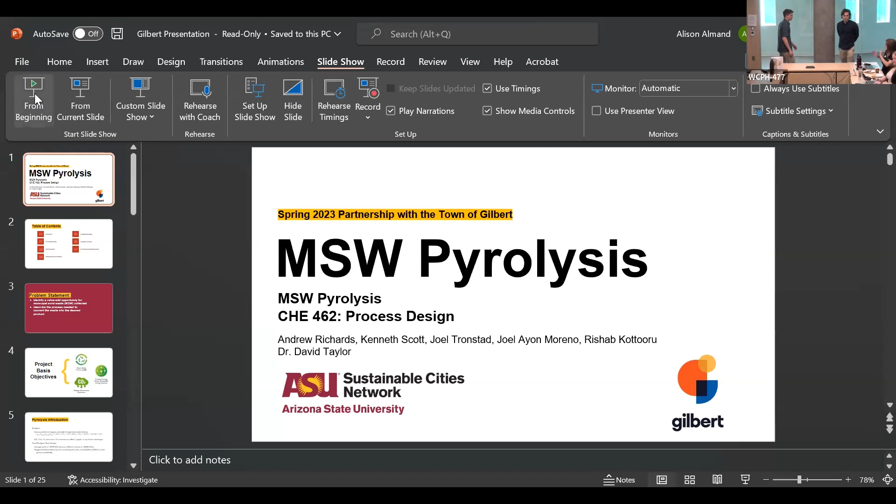So, as we mentioned earlier, the camera is set up over here, and I'll make sure you're good. Morning, Ann. Sorry, it doesn't show up much on the screen. I've got to stay focused here too with Teams running around. I'm gonna stand. This is exciting, I hope. Just grabbing some coffee. Alright, this is really cool.

Hello, we are team Sparky Solutions, and we decided to go with MSW pyrolysis, which we'll explain as we go. I'm Kenneth Scott. I'm Joel. I'm Rishab. And I'm Andrew.

We're going to walk you through an introduction on pyrolysis, our process flow diagram (PFD) along with a stream table for overall balances, a sectionalized review of our process covering 5 split divisions, and then our manufacturing cost summary, investment summary, equipment summary, as well as conclusions and recommendations.

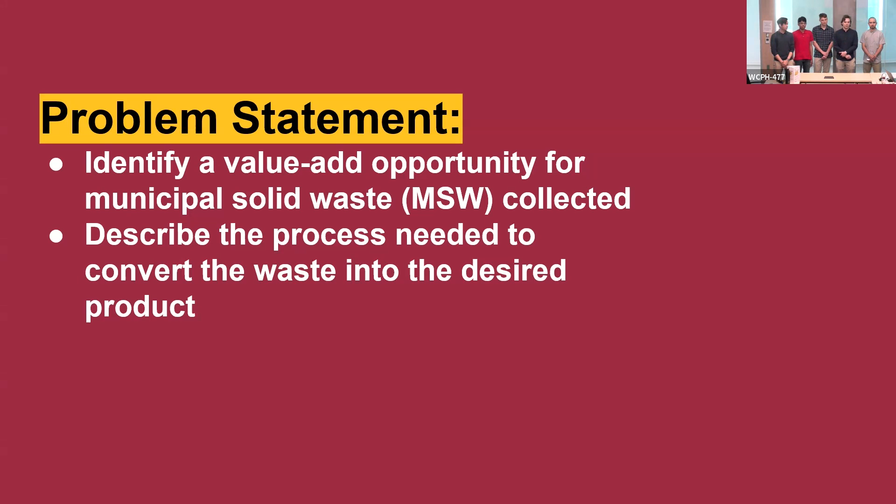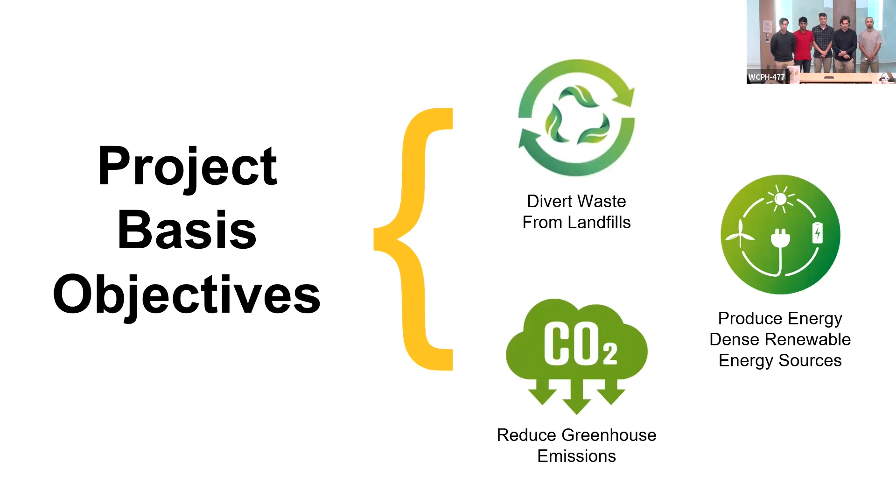To start, restating the problem statement: identify a value-add opportunity for the municipal solid waste that is already collected, and describe the process needed to convert the waste into a desired product that can be value add. Our project basis objectives were prioritizing diverting waste from landfills, producing energy dense renewable energy resources, and reducing greenhouse emissions.

So a little pyrolysis introduction. Pyrolysis is the decomposition of organic materials through anaerobic heating. That means you take things made of carbon compounds and get them very hot without oxygen present, which prevents normal combustion or fire from occurring. What that produces, as shown in the equation on the right, is bio-oil, biochar, ash, as well as carbon monoxide, carbon dioxide, hydrogen, and a little methane (CH4). Together those gases are called syngas, or synthetic natural gas.

In our final pyrolysis plant design, we ended up with an average profit of about $750,000, whereas Gilbert's current process, where they sell OCC and paper, is about $700,000 per year. Our suggested implementation would require first combining with other municipalities and their MSW to reach greater profitability.

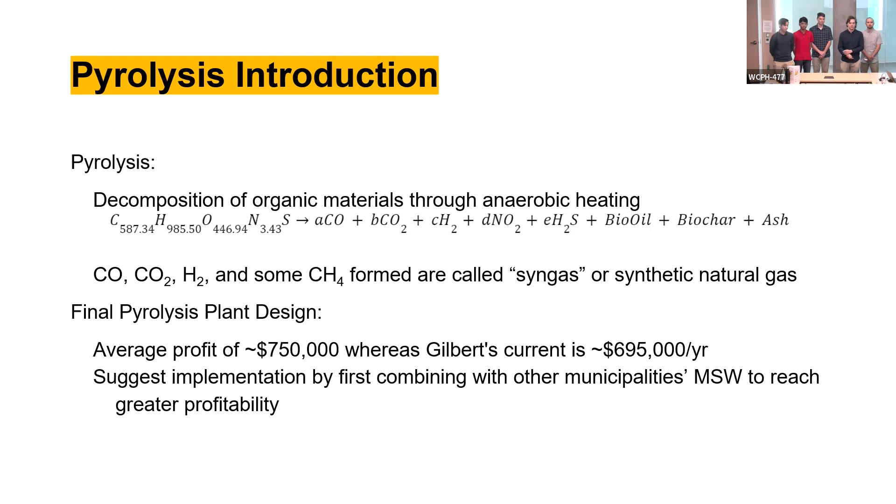So what does our overall process look like? From a high level, on the left in the green box, we take in the mixed municipal solid waste - all your glass, aluminum, plastics, cardboard, paper. On the far right, we make 2 useful products, shown in the blue boxes: syngas, the synthetic natural gas, and bio-oil, which is kind of like a natural gasoline substitute. Let's walk through the process to see how each step occurs.

First, we take in that mixed municipal solid waste and put it through a series of separators like eddy currents and knife crushers, and we remove everything besides the OCC - the old corrugated cardboard - and the paper. The rest of the municipal solid waste can be disposed of in the landfill or sold according to current methods. We then dry and crush the paper and cardboard to reduce the moisture content and particle size.

We take that mixture of dry cardboard and paper particles and put it into a pyrolysis reactor, heating it to use the high temperature to thermally decompose the organic components into useful products. From the bottom of that reactor, into the red box, we output solid biochar and ash, which we can't entirely use in our process as currently designed, so we'll probably send it to a landfill for now. Out the top of the reactor comes the syngas and vaporized bio-oil, both in a gaseous phase.

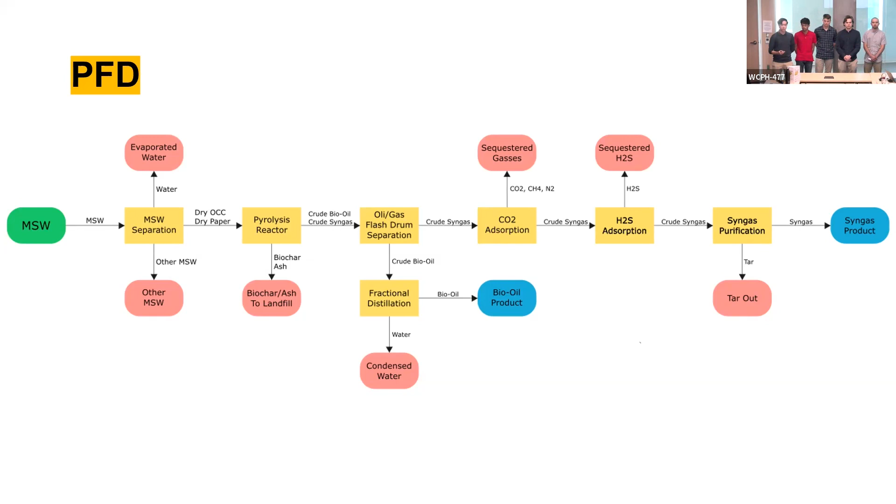At the top of the flash drum, we take the crude syngas and put it through a series of separations to purify and remove pollutants from the gas. First, there's a CO2 adsorption column where we use a physical zeolite, which captures carbon dioxide, a little methane, and nitrogen, removing them to prevent the release of greenhouse gases. After that, it goes through a dihydrogen sulfide column, which removes dihydrogen sulfide, a toxic pollutant that shouldn't be released into the atmosphere according to the EPA. Finally, it goes through one final syngas purification step where we remove some of the gaseous tar still remaining in the gas, improving the purity and heating value of our syngas product. That's the output of our final syngas.

So here you can look at our overall stream tables. This is the main inlet and the overall outlets of our process. On the left, we take in the MSW at roughly 19,000 tons per year, about 10,000 tons of which is OCC and paper, which is why we chose to simplify this process down to just those two. On our product outlet, the major products are syngas and bio-oil, and below in the waste outlet, we have biochar and water.

Water would be released as vapor through the drying processes. And the bio-oil, to give you an idea of the scale, that's about 21,000 barrels per year of oil. It sounds like a lot, but in reality, most very small scale petroleum facilities produce about 10,000 barrels of oil a day, so it's pretty small.

So it would be highly ideal to get more MSW inlet so this could be increased. Also, the bio-oil wouldn't just be one type of oil—it's not like it produces just gasoline. It produces a spectrum of oils of different densities, things like jet fuel, gasoline, kerosene, all of those. So not all of those would be used in tandem.

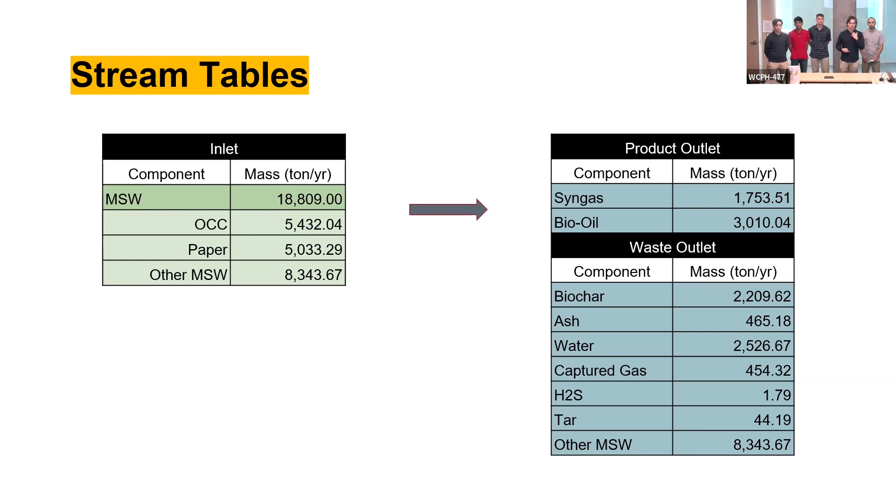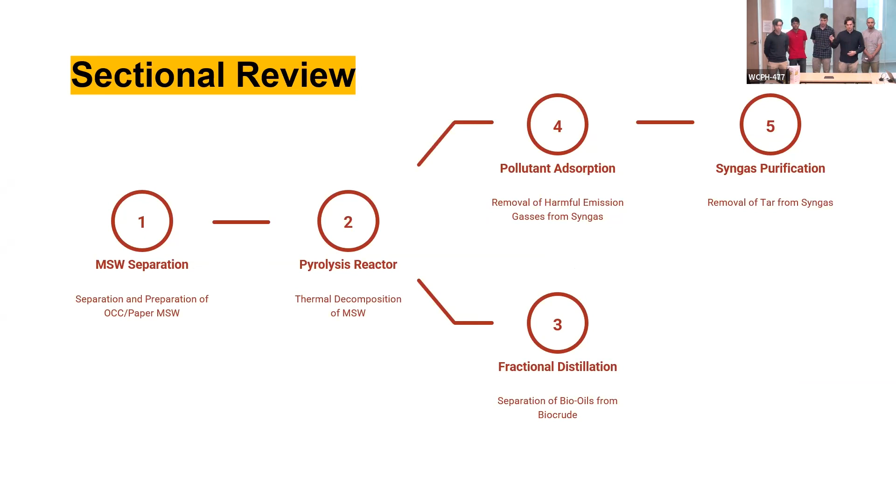So here's our section-wise review. We broke it down into 5 sections, one for each of us. We start with our MSW separation, then we have the pyrolysis reactor, then it splits off to the fractional distillation and the adsorption, and then the final syngas purification.

It was concluded that the addition of an optical separator was the best alternative, as it reduced the personnel operation cost significantly without raising the initial equipment cost or energy consumption too much.

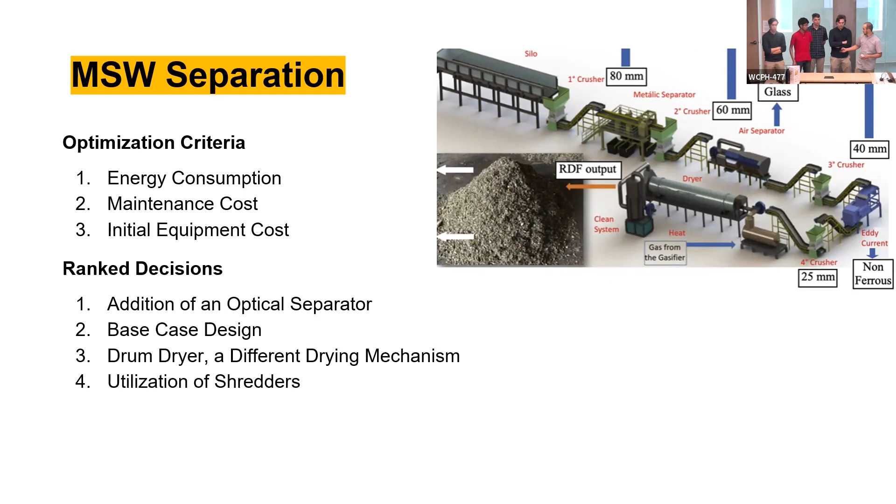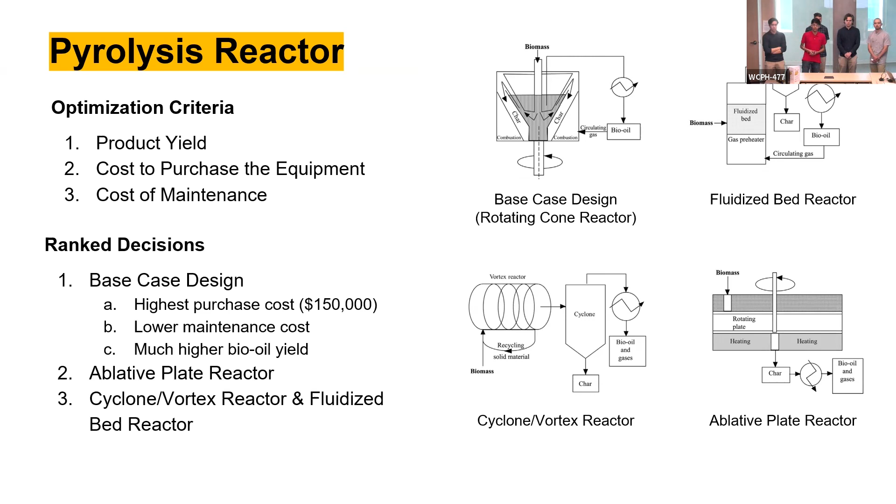Additionally, despite the higher purchasing cost of the rotating cone reactor, it has a lower maintenance cost—$70,000 to maintain, whereas the other reactors range anywhere from $72K to $85K. According to various literature studies, it has repeatedly been found that the rotating cone reactor can produce a higher yield of bio-oil compared to the other reactors.

Now, here are some applications of the rotating cone reactor. So this reactor is pretty new, but it's being used in other parts of the world. For example, currently a company in the Netherlands known as BTG-BTL is converting sustainable biomass into bio-oil using a rotating cone reactor. And many pyrolysis plants in Malaysia are also implementing this reactor. So they're taking fruit bunches from palm trees at a 50 ton per day capacity to produce this bio-oil.

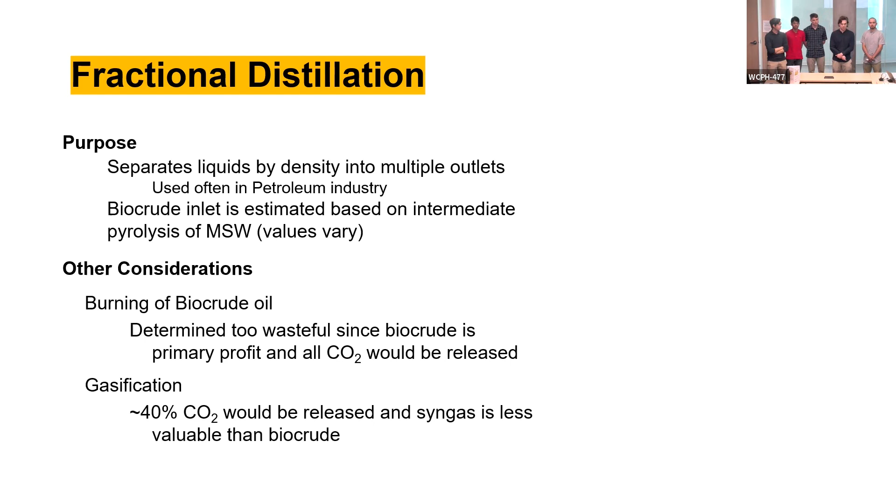And gasification would turn bio-oil into syngas. So we could have one pure outlet rather than two separate ones. However, with that one, once again about 40% of the carbon would be turned into carbon dioxide and would end up being released. And syngas is also less valuable than biocrude per kilogram. So we decided not to do that.

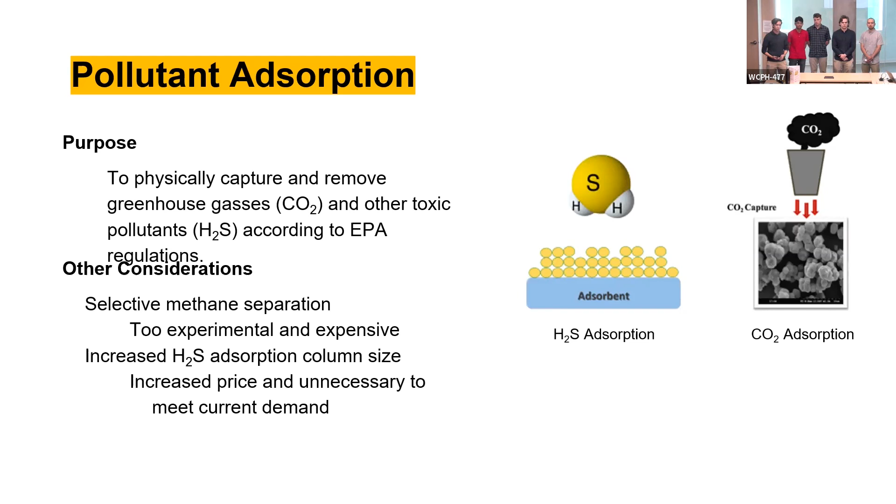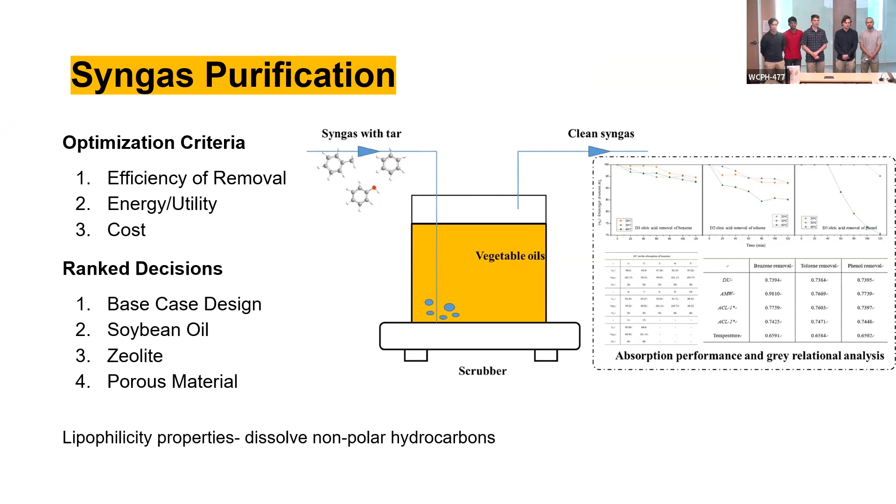The soybean oil operates very similarly to vegetable oil. However, it isn't quite as efficient. Our vegetable oil was able to achieve 95% efficiency, according to literature, whereas soybean oil was around 90% efficiency. Zeolite and porous material are other purification possibilities. However, those were also around 90% removal efficiency and were also more expensive.

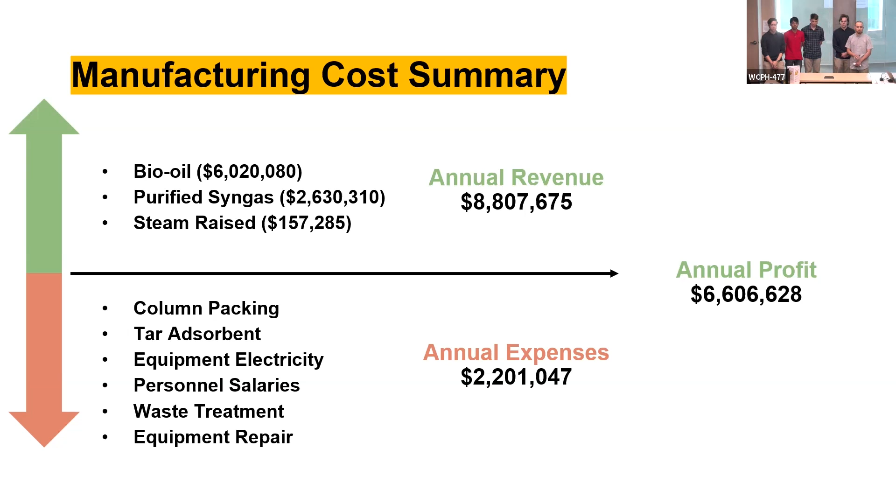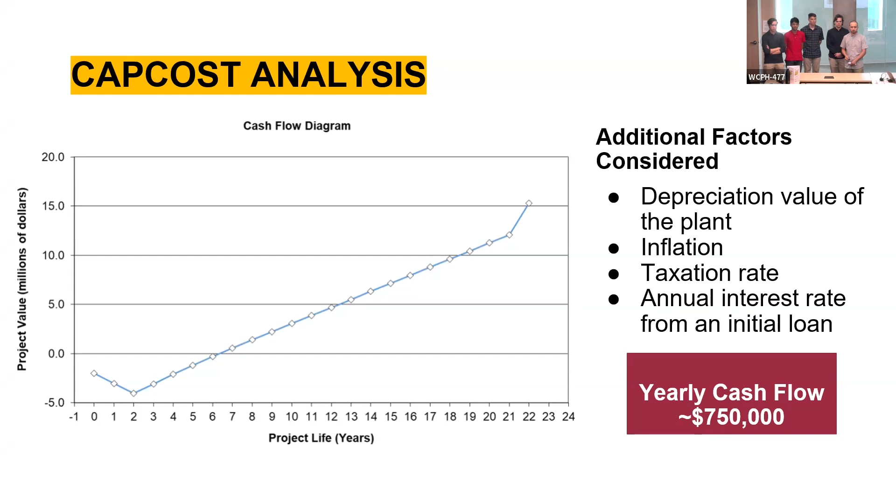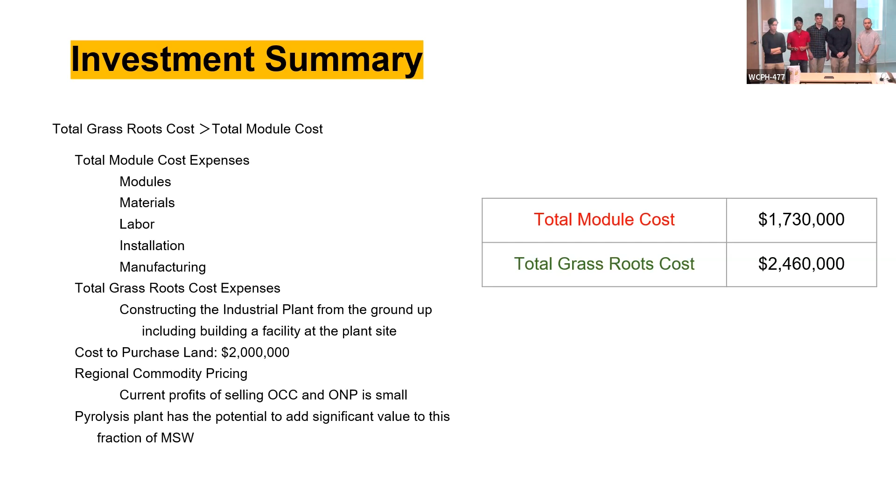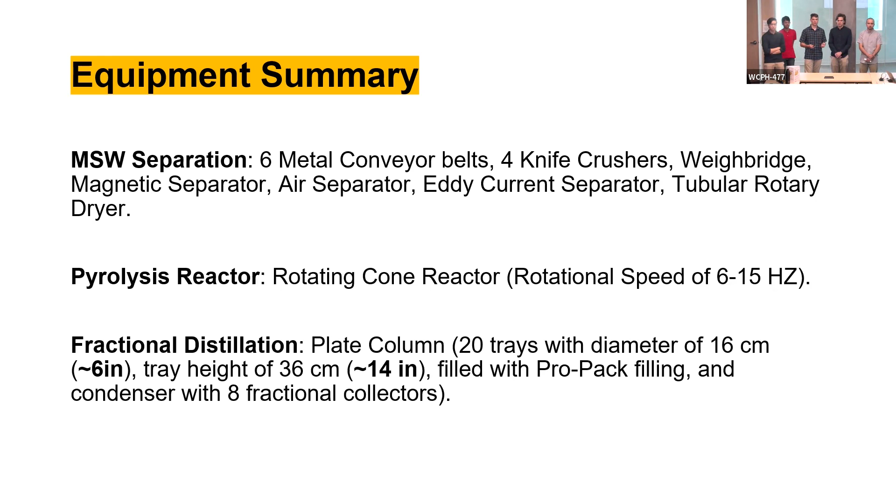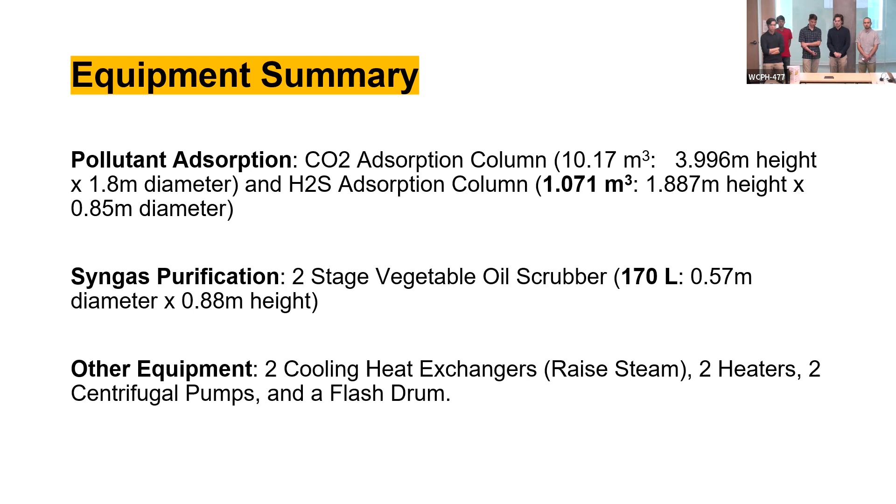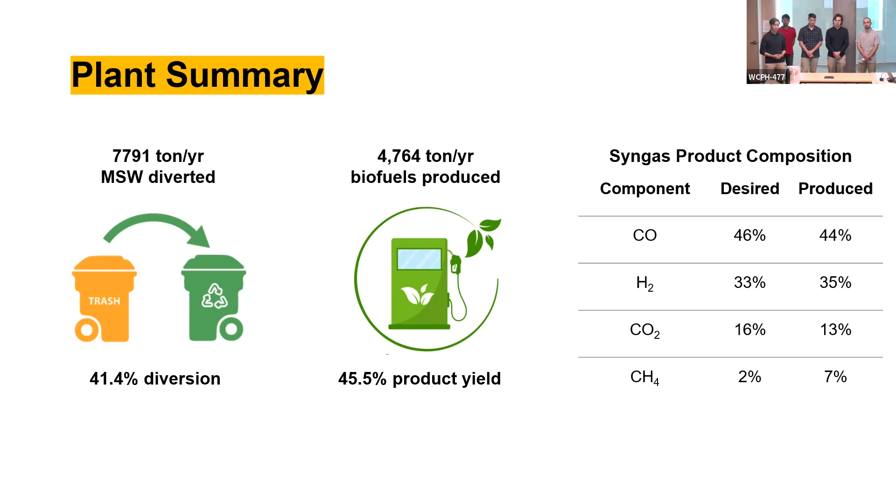In conclusion, we believe that an intermediate pyrolysis plant can be a viable option for the town of Gilbert, as it would reduce the landfill waste, generate clean energy, promote sustainable development, as well as reducing its greenhouse gas emissions. We also believe that the plant should not be constructed unless more consideration is given on expanding its MSW intake volume, as this would increase its profitability.

And we have some recommendations as well. So one, we want the plant to essentially consider expanding the feed to plastics other than polyvinyl chloride, known as PVC, as well as consider garden waste and food waste. Additionally, we will want an analysis of an MSW sample. Well, this is what we recommend. That way you can have a definite amount of syngas and bio-oil from the MSW feedstock.

And when you conduct this analysis, you're going to get 3 contents, which is the moisture content, the organic content, and the ash content. Primarily the parameter that is of most value is the organic content, especially when you're dealing with hydrocarbons and garden waste and food waste. And additionally, we recommend collecting and incinerating the biochar and ash, because this is going to generate additional electricity and potentially assist in powering the plant.

Thank you. You want me to ask a question now or wait until the time? No, we will do questions now. We have about 12 minutes for this. Oh, may I? Thank you. Yeah, go ahead. Do you want to introduce yourself too? Yes. I'm just a random person just walking.

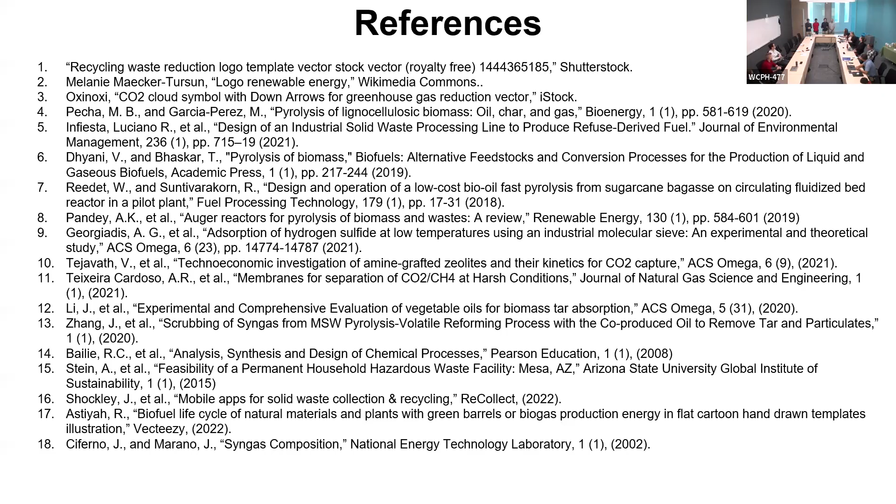Like I said, the bio oil outlet could end up being 60%. I believe we assumed about 40%. Give me like 25 maybe. Yeah, and then you guys could end up testing out these materials and see it's actually only like a 10% bio oil outlet. Fortunately, that's pretty easy to test. In fact, we have a lab here on campus, Professor Dang, whose lab Andrew and I are joining. They test that themselves. So it's something you're able to get if you're more interested. However, it is very experimental. All of this is very pilot plant technology.

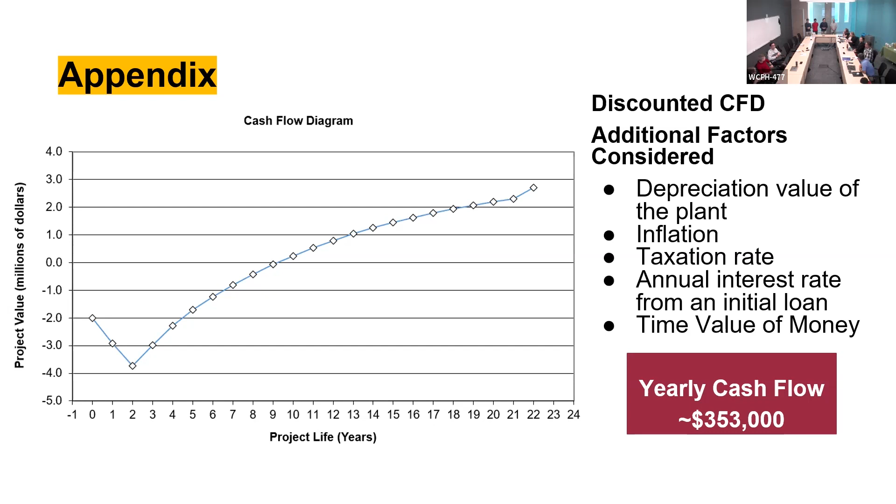And that's the concern that we have, because a lot of times when we go to our elected council, our elected officials, to ask for capital, right? They're gonna look at data points. They're gonna say, okay, who in the valley or who in the region is using that, right? And it's hard to convince them when you have a new technology of less than a year, because we don't know what the implications are for maintenance, for sustainability, right? And so that's the worry. Sometimes it's tough when you have this great idea, innovation, and then it just takes 5 or 6 years to build up data points, right?

Those are the do's and don'ts. Certainly, we wanted to give a more far-off view. So if Gilbert ends up deciding to do something in the short term, but then comes back to this problem in maybe a decade, maybe past 2030, when there are more plants that are fully operational, this could be sort of a reminder of what exists as a potential.

These technologies aren't brand new. The pyrolysis reactor we use, I believe, was designed in the 1980s. The issue is no one has been able to, or had the motivation to, scale these up into larger plants, because there hasn't really been a reason to when oil is comparatively so cheap.

The application for this is that because we're one of multiple cities in the valley, collectively, it's our job to build that relationship where it's easier if we have a regional facility, right? It makes a lot more economic sense. Yeah, and they said to put in all the MSW from all the different places like that. But the officials, we all have egos, right? It's like, well, we could do it better than everybody else. So that's the stupid thing about the politics.

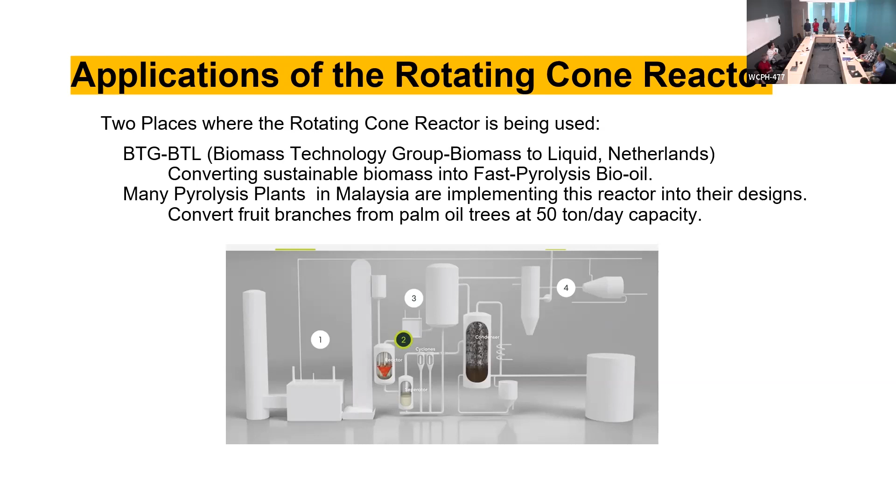Sorry, no more questions or comments. I'm sorry. Yeah, no, you're all good. Paul, do you have any comments or questions? Yeah, I just want to say this is pretty amazing. I don't actually understand the process you guys were talking about. It's above my head. He did read your report. He was like, it was a little over my head, and I was like, me too, but this is great.

I'll share with you the energy shortage, fuel shortage issue. Imagine if your police department or fire department didn't have fuel to make service calls. That was a situation recently where that was a possibility, where fuel was being threatened and wasn't in immediate supply. This could help shore up those essential services where the fuel is immediately there.

Typically with bio oil, you tend to mix it with the current petrol, and I believe the typical amount you can mix up to is like 20% bio oil. So it's very relevant to what you're talking about. This is exciting, thank you.

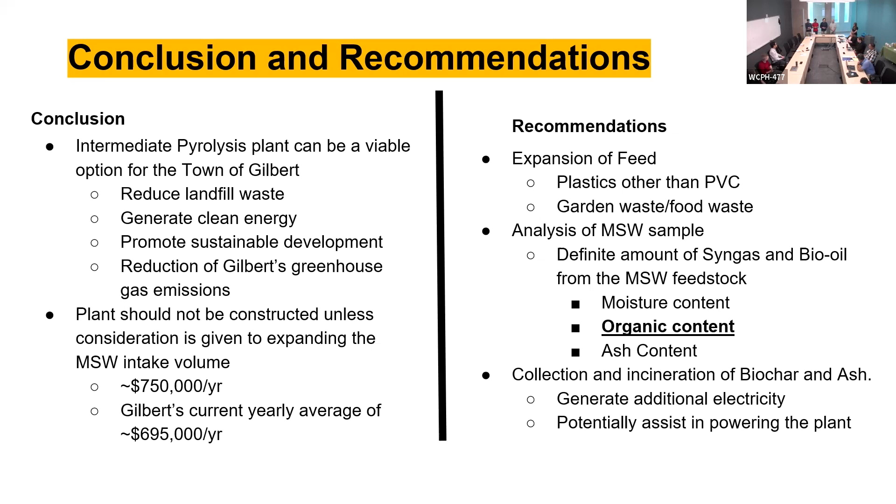The feed can be anything that's organic. You could throw a table in there, and as long as it's made of wood, it would still work. Plastics are made out of carbons formed into long chains as polymers, those can work. The only reason PVC doesn't work is because it's half chlorine, which is very noxious. So it's not that it physically doesn't work, it's just going to cause more pollutants in your gas that you have to take out, so it's just not really economical.

Garden waste can include anything from lawn clippings to palm fronds to anything like that. Anything organic could go in this, including food waste like old burgers. The East Valley doesn't necessarily have a big collective green waste program right now, so it's going to be cool.

For your vegetable oil, I was curious, is that something that could be recycled vegetable oil? So you have different restaurants in the valley that could actually feed that process, so to speak, that resource. You're helping solve one issue by providing that for your facility, so that's another thought that I have.

Greenhouse gas emissions are going to become more and more important, I think, for cities and towns to calculate, reduce, and so forth. So did you look at all into the carbon neutrality of this particular process?

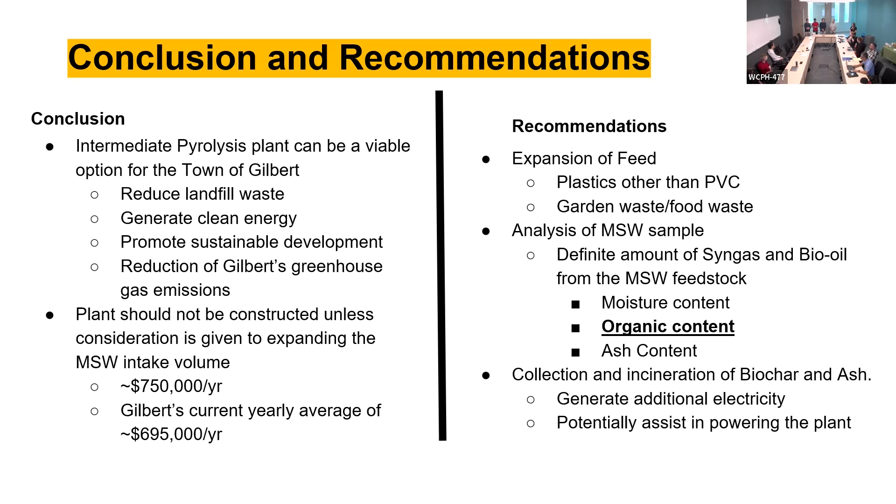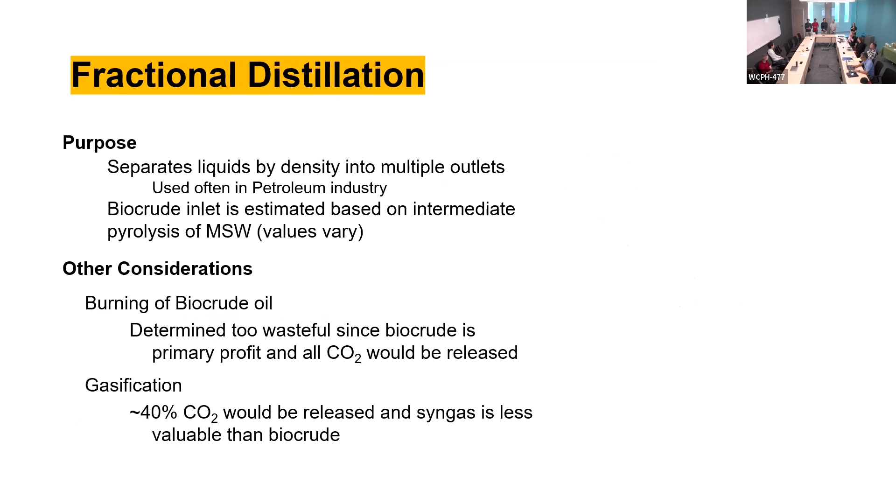Generally, I believe pyrolysis is considered fairly carbon neutral, in the sense that the carbon dioxide is basically trapped in the plant, and then you release it again when you burn it. So it's kind of neutral in that sense if you aren't releasing more than was already in the atmosphere, because to grow the plants you need to take in the carbon. We also try to remove, I think it's about 60% of the carbon dioxide that we release, so in that sense we try to approach a carbon negative process, but it may not be perfect. But we're trying.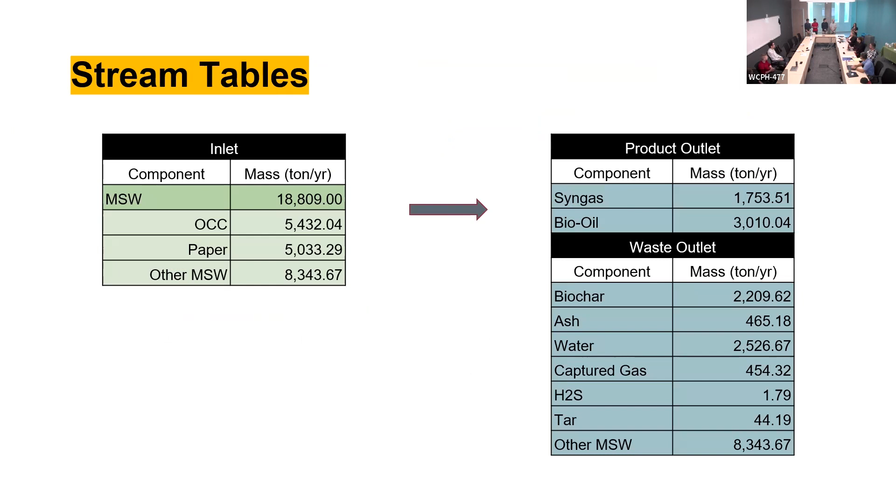Hi everyone, we're the Waste Wizards and our project was Waste Diversion for the town of Gilbert. I'm Jamie, this is Hallie, Hanley, and John. Lucas is sick today, so we will be presenting his section.

Here's an overview: we will be going over the background, purpose, and main objectives. Next, we will discuss the optimizations and final design of our project. Lastly, we will conclude on the economics and summarize the key findings and future recommendations.

In the town of Gilbert, there are around 270,000 residents, as you guys know, and that number is continually increasing. So we wanted to come up with a system to deal with the 3,000 tons of municipal solid waste produced weekly. Currently, of those 3,000 tons, only around 12% of that waste is being recycled.

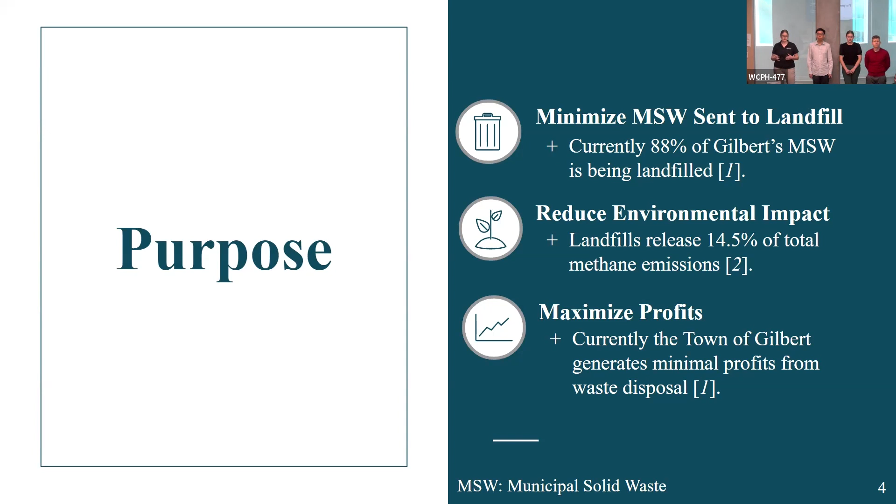After collaborating, we came up with 3 goals for our design to address. First, we wanted to minimize the amount of waste sent directly to landfill, because currently 88% of those 3,000 tons go directly to landfills. We also wanted to reduce the environmental impact of the MSW, since landfills are heavily responsible for methane emissions, which is bad for air quality and pollution. Lastly, we wanted to maximize profits for the town of Gilbert, designing a system that would be profitable and able to last throughout the years.

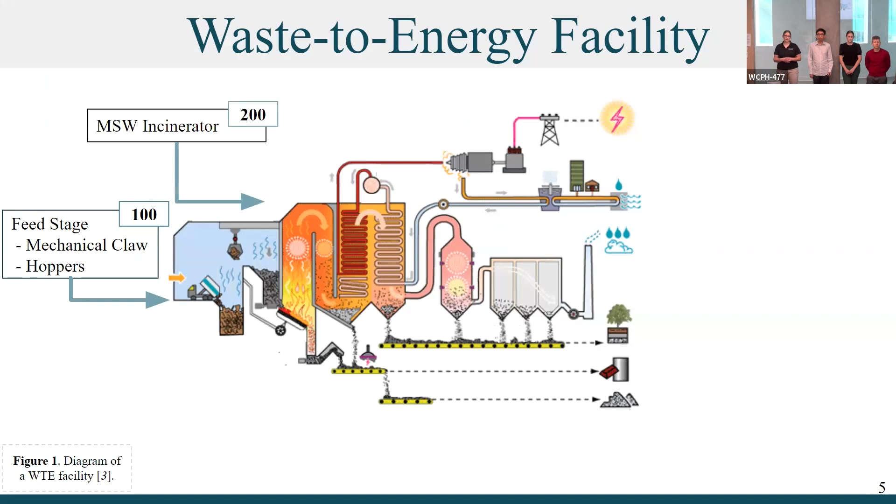We developed a waste to energy facility with 6 main sections. In this facility, waste is taken in, burned, and the heat generated is eventually converted into electricity. The first section is the feed stage, with the mechanical claw and hoppers. Section 200 is the actual incinerator. Then the heat exchange system, then flue gas treatment, which includes a scrubber, a baghouse, and a stack. Section 500 is the power generation section, including a steam turbine and generator.

That power generation section is our most profitable, because that's where electricity is generated. Then we have the separation stage, section 600, which includes a rotating drum and eddy current system. This is our last effort to get the metal out, which we can also sell for a profit.

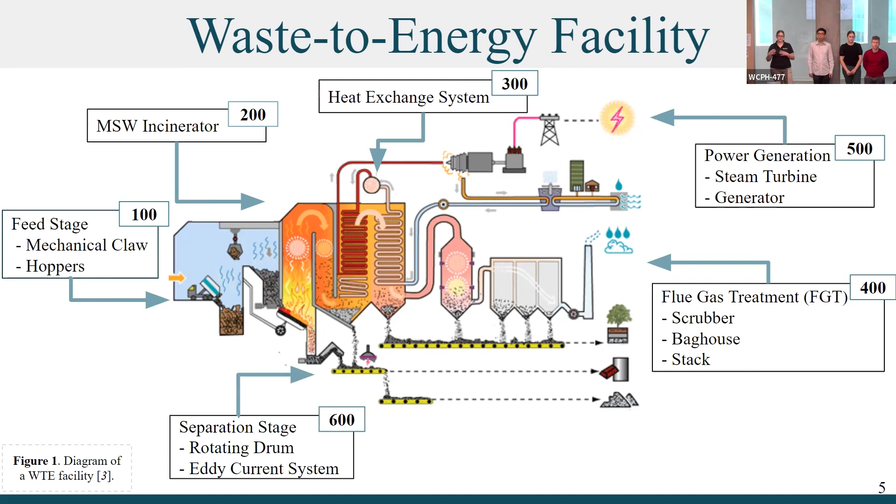As mentioned, section 100 is the feed stage of the plant. In this stage, garbage trucks bring the waste and drop it on the tipping floor and storage pit area. Then a mechanical claw moves the waste into hoppers to be fed directly into the combustion chamber. When designing this section, we had 4 main design criteria we wanted to look at.

The criterion that came out as most important was efficiency, because we wanted to make sure we could effectively move material from point A to point B without a lot of issues and without causing backup for the rest of the plant. Safety risk, capacity, and technological readiness were also really important, since they all impact our ability to move the material.

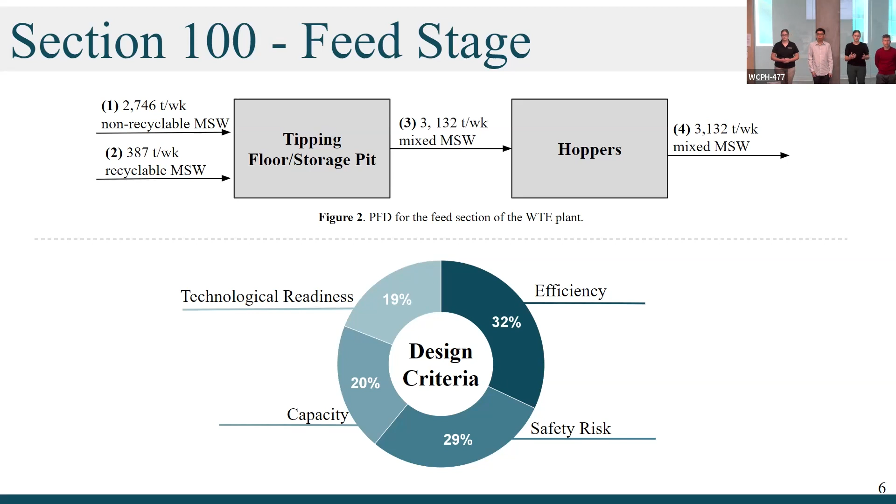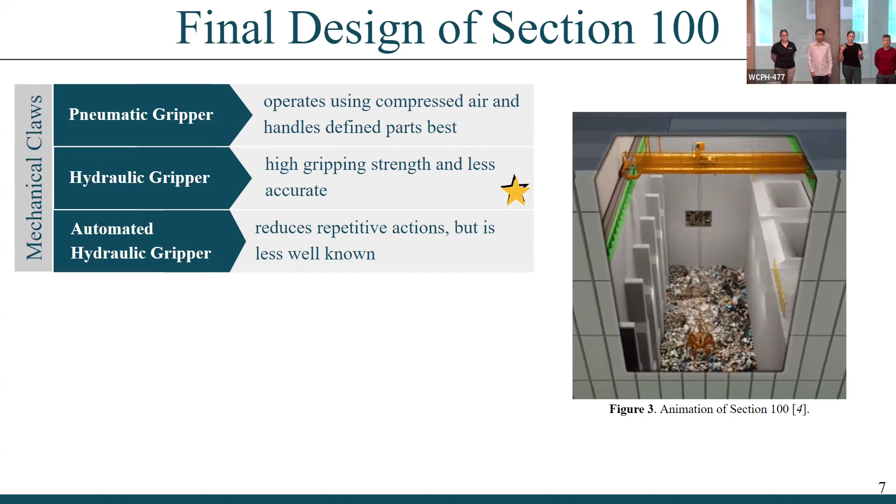For the final design of section 100's mechanical claw, we initially looked at 3 different designs: a pneumatic gripper, a hydraulic gripper, and an automated hydraulic gripper. We found the hydraulic gripper was best because it had better gripping strength than the pneumatic gripper and was better able to handle the quantity we needed. For a similar reason, the automated hydraulic gripper fell slightly below the normal hydraulic gripper, since the automated portion wasn't as well known and researched, so we decided to go with the manually operated hydraulic gripper to be sure it would work.

For the hoppers, we also looked at 3 different designs based on the steepness of the walls: one with a steep back wall, one with a steep front wall, and one with both a steep front and back wall. We found that when both walls are steep, it allows for a more continual flow of material, giving a steadier stream into the combustion chamber. This was really important to help maintain the steady state value of our plant.

In the figure, you can see the mechanical claw grabbing the waste and moving it into a hopper.

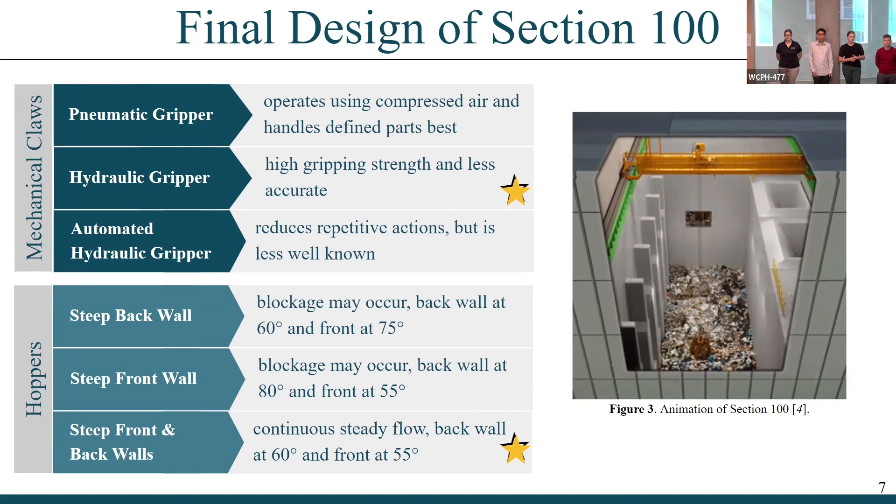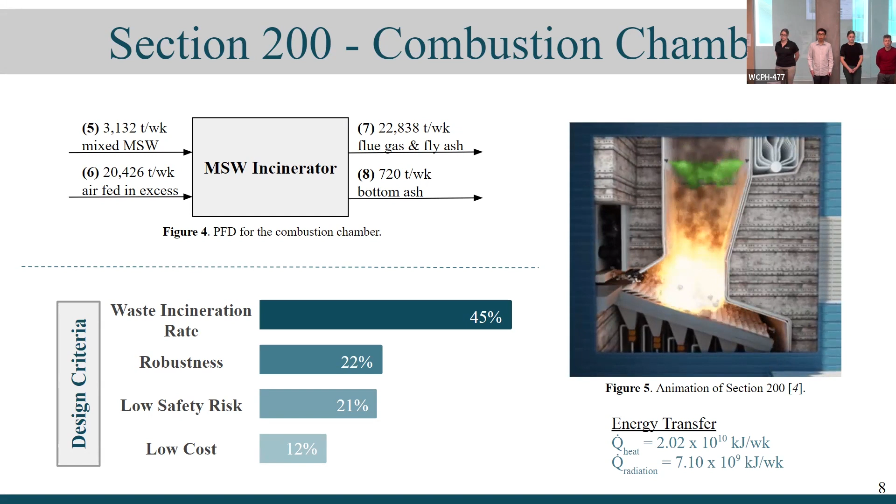We decided to choose the MSW incinerator due to its ability to process as much MSW. It's a continuous reactor, so it's able to process a lot.

Next, we have the rotary kiln incinerator. It's also a continuous combustion reactor. However, it is typically more expensive and not used as often as the MSW incinerator.

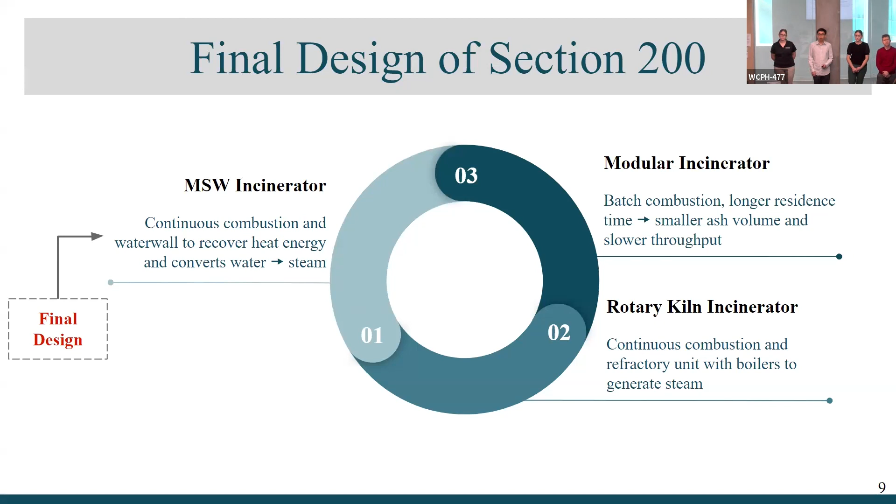Lastly, we have the modular incinerator. It operates in batches. However, it lacks in waste incineration rate, but it has longer residence time, so the ash volume is going to be smaller. But we chose the MSW incinerator. So the next section is the heat exchange system.

As you can kind of see in figure 7, the system is actually built into the incinerator. The tubes line the walls, and as the water travels through the tubes, it's converted to steam.

For the system, we wanted a really high efficiency. As you can see in figure 6, the water that enters is converted into steam. We wanted high efficiency because the steam goes on in later sections to actually produce the electricity.

When designing this system, we looked at 4 design criteria. The most important one was the lifespan of the material, rated highest because we didn't want to continually replace this system, mainly due to its high cost, and also because that would create additional downtime of the plant. We also wanted the system to have a high thermal conductivity value.

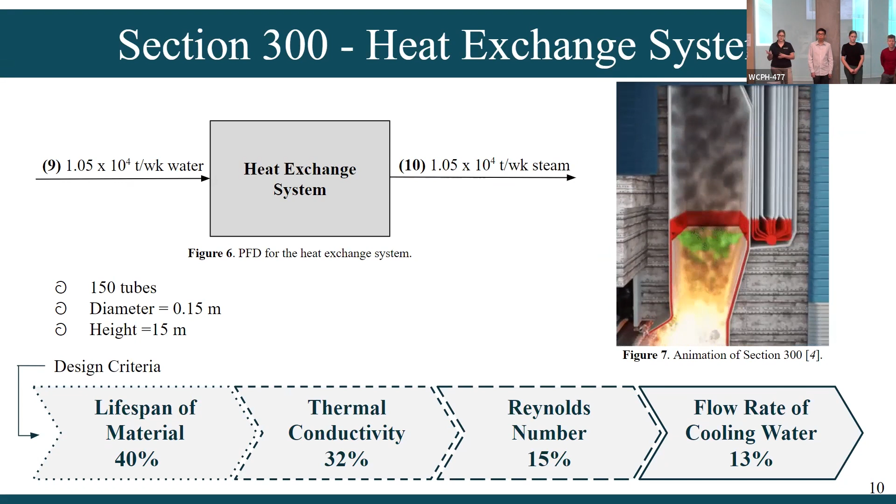The thermal conductivity of the material directly relates to the amount of heat transfer that can occur. The higher the thermal conductivity, the higher the heat transfer rate, which will produce more steam and eventually more electricity to be sold.

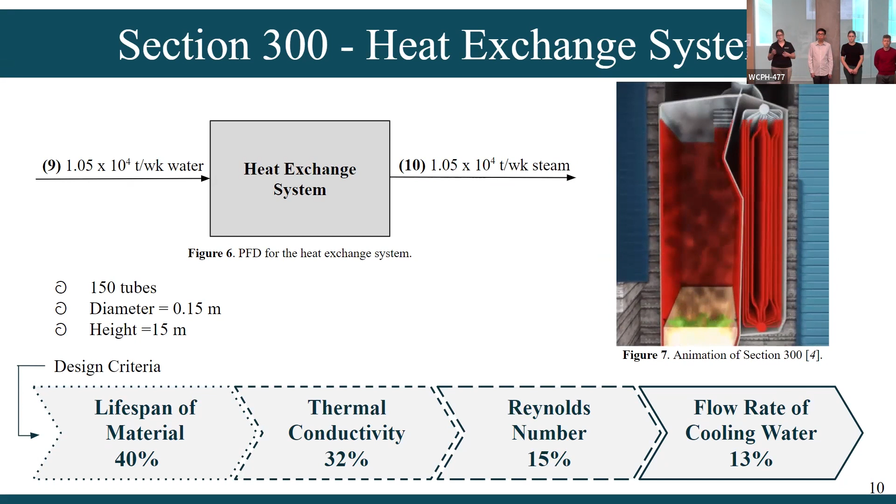We also wanted a high Reynolds number value. This relates to the mixing in the tubes, because a higher Reynolds number relates to higher mixing, and that will result in more steam production too.

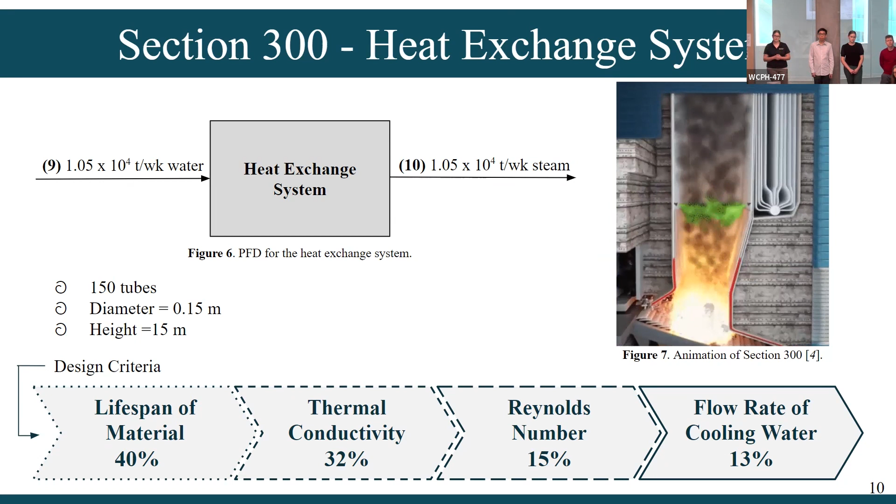Lastly, we wanted a high flow rate of cooling water. The more water we can move through the system and convert to steam, the more electricity we can generate and eventually sell. With this in mind, we came up with 3 designs.

We varied the type of material between ceramic and steel, and the type of flow between turbulent and laminar. The steel and turbulent design was better than the other 2.

When you look at the ceramic and turbulent design, the steel and turbulent design was better because it had a higher heat transfer rate and a longer lifespan compared to the ceramic material. The ceramic did not hold up very well.

When compared to the steel and laminar design, the steel and turbulent design had much higher mixing in the tubes. As you can see in figure 8, the turbulent flow allows for more mixing and more heat transfer to take place. For these reasons, we went with the steel and turbulent design for the heat exchange system.

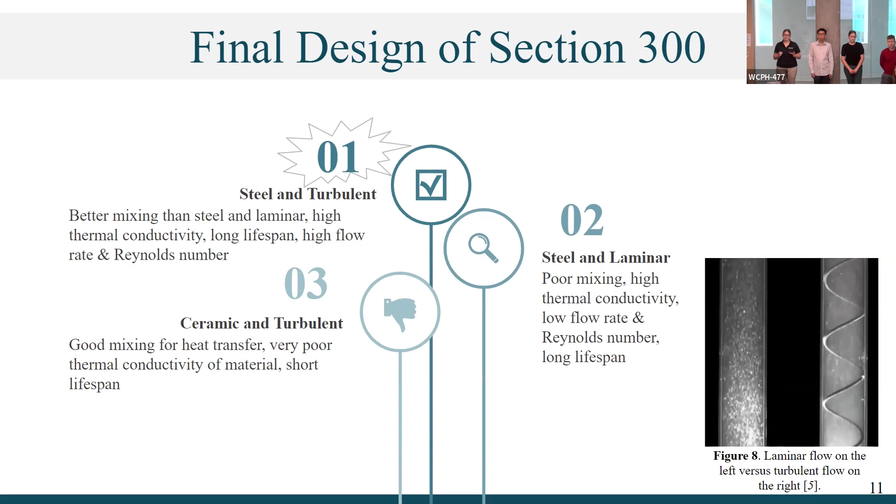After the flue gas passes through the heat exchanger, there's going to be a lot of pollutants in that airstream. We need to remove those before we can release the treated air to the environment. We do this in 3 stages.

Our first stage is a wet scrubber, which uses a scrubbing agent to remove pollutants. Second stage is the baghouse filter, which removes physical contaminants such as fly ash and dust. Finally, we have the stack itself, which lifts the treated air up and releases it at an altitude where wind speeds are higher to aid in dispersion.

At the top, you can see our mass balance for the flue gas treatment. The flue gas comes in, is scrubbed with the sodium hydroxide scrubbing solution, and wastewater comes out as well as the scrubbed flue gas. Then it also goes into the baghouse, which has a filter cake as a byproduct.

This filter cake is combined with the bottom ash from the incinerator and sent to the landfill. Those are the only 2 things sent to the landfill. Finally, we have the treated air coming out of the top of the stack, which is usually monitored to make sure it is below EPA regulations.

At the bottom, you have our criteria used to optimize our piece of equipment. For the scrubber and the baghouse, we have amount of chemical species removed as the highest at 45%. Regulatory requirements met, safety and ease in operations, and equipment costs are also some other criteria we had.

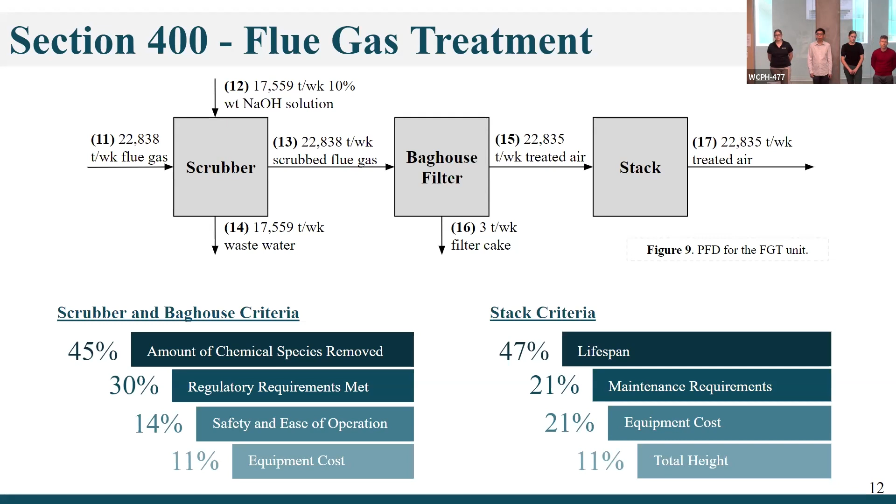So for our scrubber optimization, we looked at 3 different designs: the Venturi scrubber, the seawater FGD, and the packed bed wet scrubber. You can't see it, it's hidden behind the little screen right there, but there's a star by the packed bed wet scrubber indicating that that's the one we chose. The reason is because a packed bed wet scrubber is going to have the added benefit of increased contact time between the scrubbing liquid and the flue gas itself. This makes the packed bed wet scrubber much more efficient when compared to the other two.

So for instance, if you had a packed bed wet scrubber and a Venturi scrubber that were the same size, let's say the Venturi scrubber only removes 90% of pollutants, the packed bed wet scrubber would be most likely over 99.9% efficient. So that's why we chose that one. And the seawater FGD scored the lowest because it only specializes in removing sulfur dioxide. So it's just not going to work for our purposes.

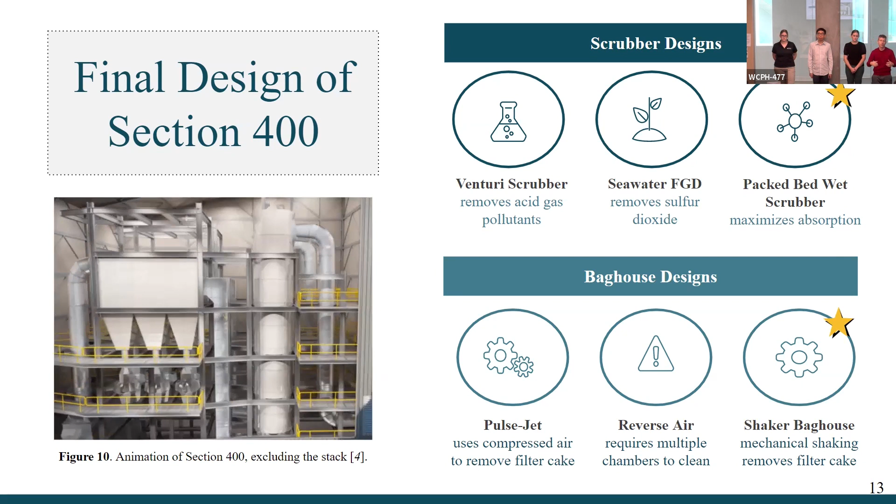For the baghouse design, we have the pulse jet, the reverse air, and the shaker baghouse. These three names really refer to how the baghouse is cleaned to remove the filter cake. Pulse jet uses compressed air. Reverse air is literally just run backwards to remove the filter cake. And then the shaker baghouse just literally jiggles it back and forth to remove it. We chose the shaker baghouse as the most efficient because you don't have to shut down the system in order to clean it, and also it's the easiest to maintain.

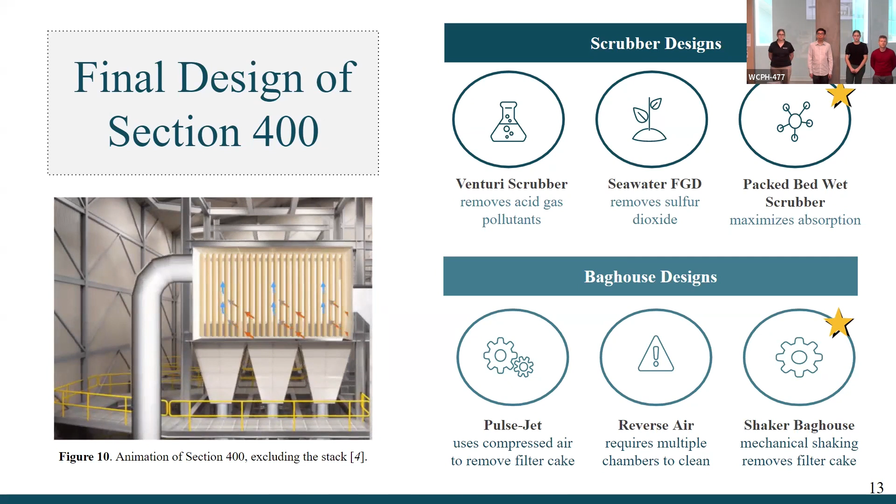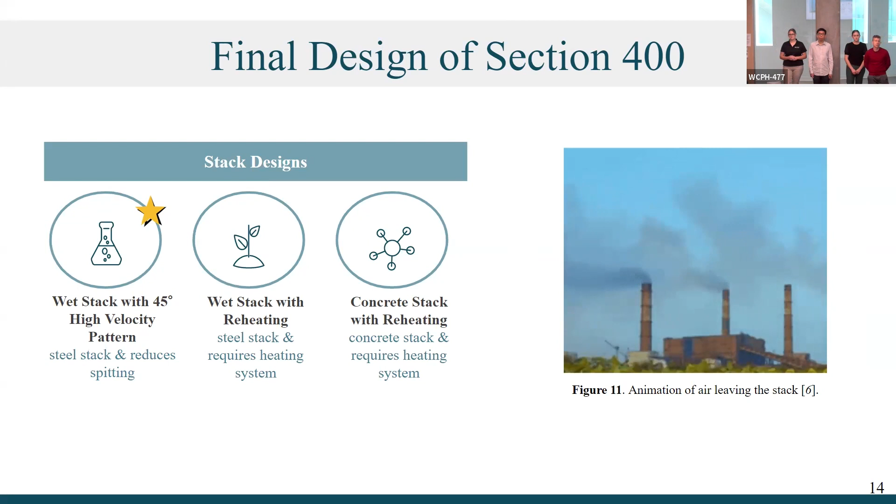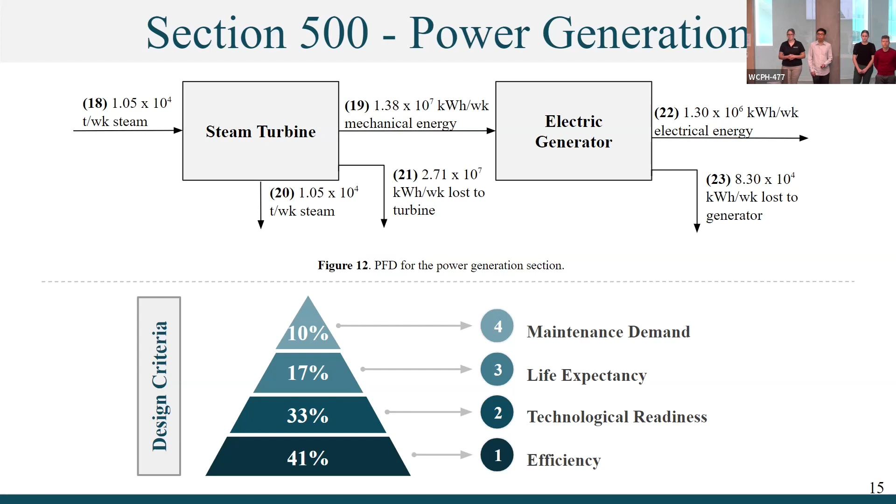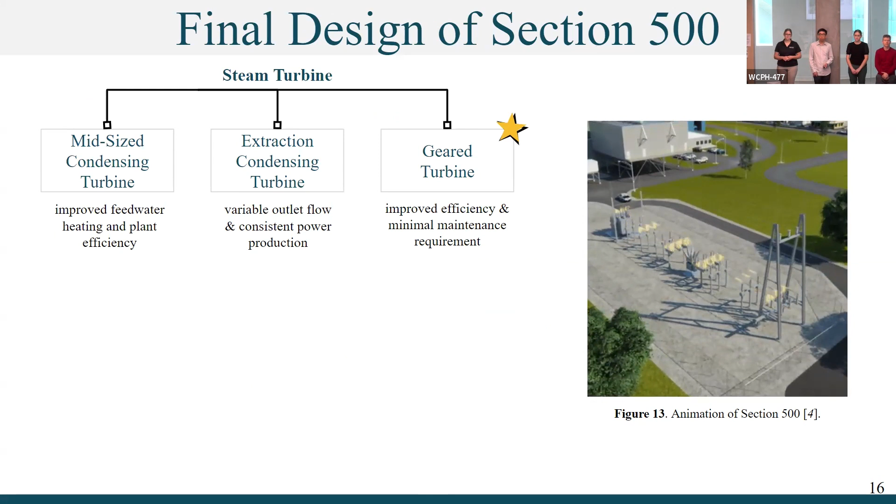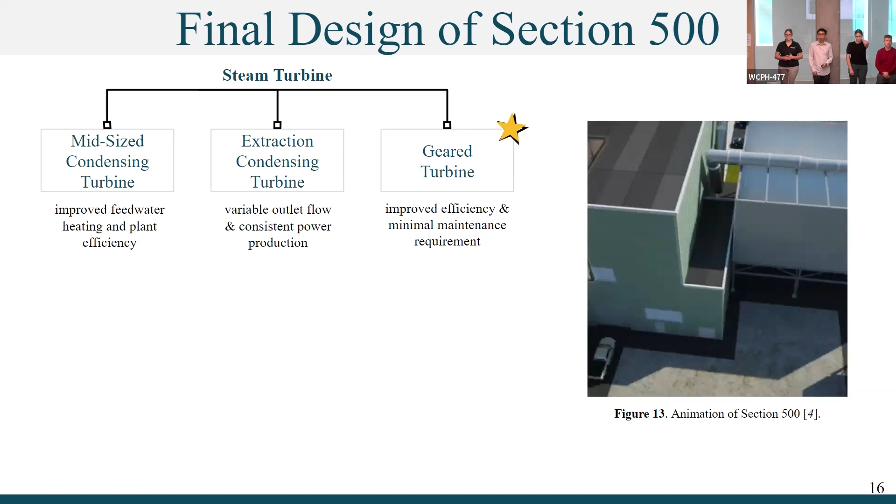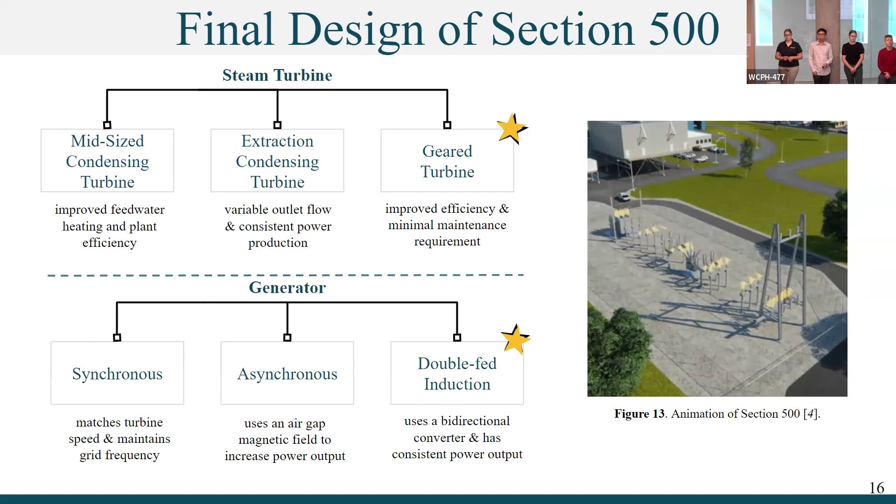Next, we have technological readiness. It had to be existing and low risk. Next, we have life expectancy and maintenance demand. So the final design for section 500, we had mid-size condensing turbine, extraction condensing turbine, and geared turbine. We chose the geared turbine due to its high efficiency. It's able to maintain constant and high spinning, which results in the high efficiency, and it required minimal maintenance. And for the generator, we decided to choose the double fed induction because it was bidirectional and had consistent power output.

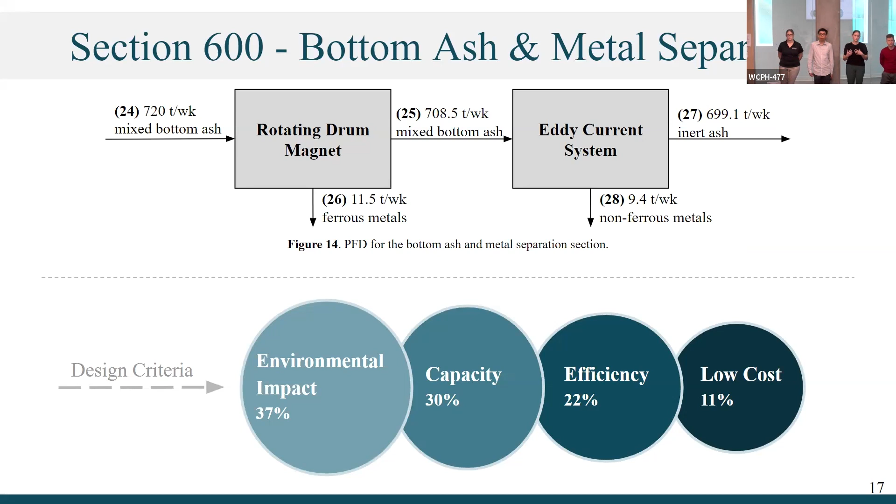So for the final design for section 600, we looked at 3 different designs for the rotating drum magnet. For each of these designs, the main difference between them is the magnetic strength. What we found is that it would be better for us to use a stronger magnet so that we are able to remove a greater amount of the ferrous metals.

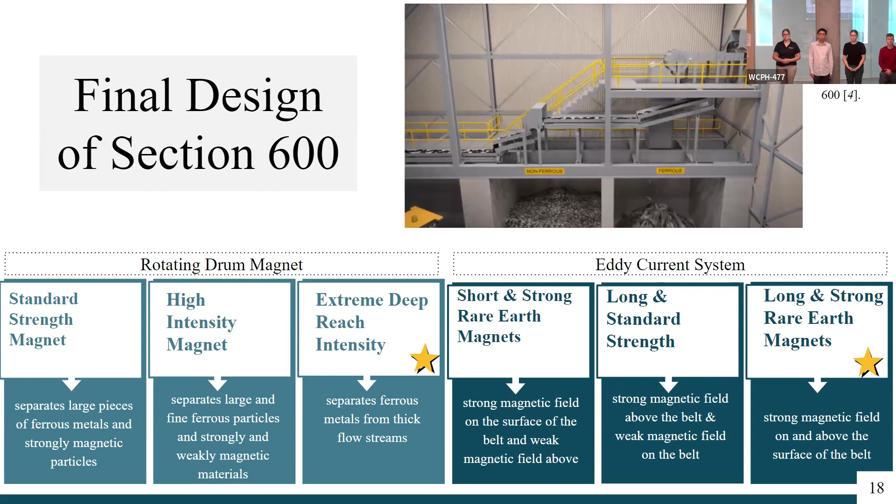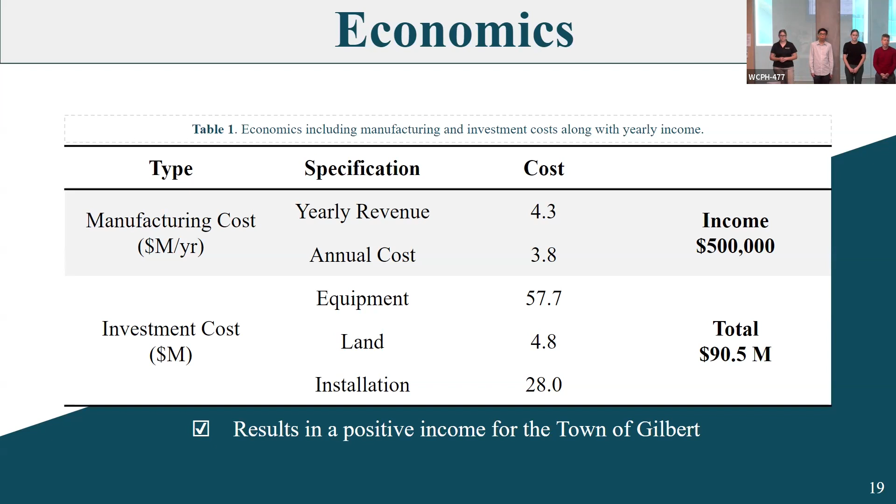In conclusion, we believe this is a good idea for the town of Gilbert because it meets our objectives. Like I said, a lot of the waste that's being sent to the landfill is reduced. Also, any of the pollutants that are recovered in the flue gas treatment are going to be halted from actually making it into the environment.

This includes all the methane that would be released if organic waste was sent to the landfill, which is basically going to be methane, which then converts into CO2 over its lifespan. And also the town of Gilbert would be able to make a profit using this design.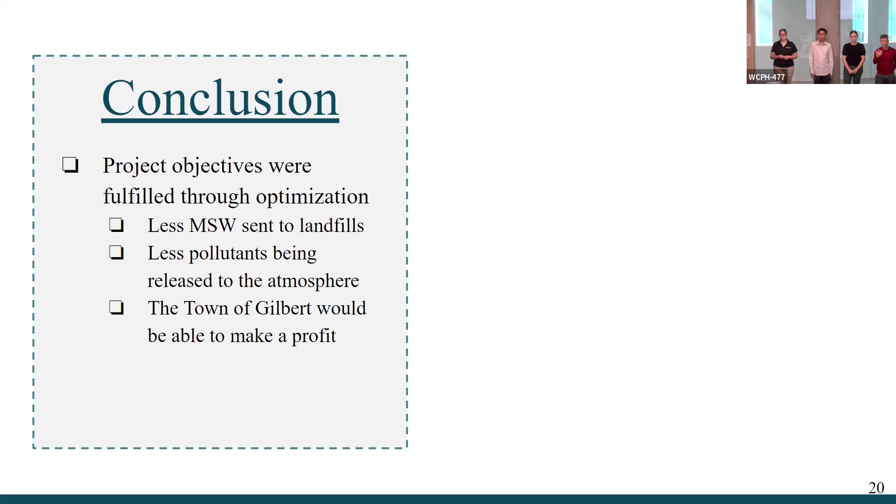For recommendations, we have some improvements that could possibly be implemented in terms of recycle streams. So the flue gas treatment can have a recycle stream added for its wastewater that comes out of the scrubber, which can then be reused and will reduce the need to deal with hazardous waste as often. We can also add a recycle stream to the heat exchanger as well, which will reduce water costs or water need of the plant.

We also recommend that the town of Gilbert go ahead and pair with other cities nearby to handle the large investment costs. And also the plant is not really operating at capacity, so it could handle more waste. So that would also improve the amount of electricity that's generated as well.

And then also, as it is right now, the plastics are just being burned. So you could actually do a combination of the two where they would be separated, and plastics could possibly be recycled, and then you could also use some more organic waste to be converted into biofuel as they suggested.

And then also, once the plant is up and running, it really would be a matter of constant improvements because all this stuff that we're doing is based off of other facilities that are in operation, and it might not be an exact one-to-one comparison of what we're actually burning. So we went worst case scenario for all of our sections. So in reality, it will probably end up being a better situation than this, but we just wanted to plan for the worst.

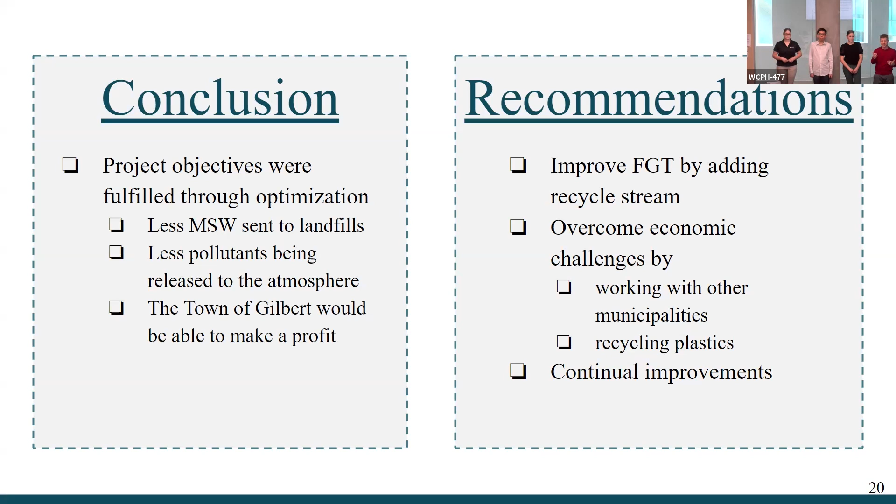Got like 15 minutes. I will allow our colleagues to go first. Paul, Ann? Not questions, but just, again, the process a little over here, but I'll share that about 2005 or 2006,

we did a waste study with the city of Mesa. An organization had approached us for a waste to energy facility that they wanted to put next to the SRP plant in Gilbert. At that time, there wasn't enough volume for it. So they didn't think it was a feasible project to continue with. That was back in 2005, 2006.

I think cities and towns have grown since then. Just a little. Yeah, just a little bit, but also, and I just learned this earlier this week, another one of our divisions in the town, Public Works, I believe they pay over $1 million a year for some of the electricity for the streetlights and traffic signals, things in the right of way.

So we're paying a cost for all of that, but if we have a waste to energy plant, we can reduce those costs so we can capture that energy, and then also reduce our landfill fees, which were about $2 to 3 million a year. So there's already savings at that front end. Great work.